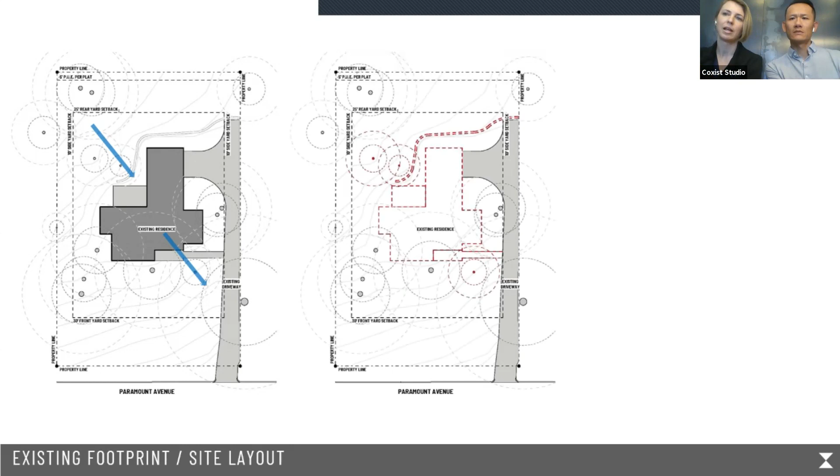This next one's just showing we're demoing out the retaining wall and demoing the existing residence. What was left here is just a quick layout of the half critical root zones and the quarter. The half is the lighter green and the quarter darker green. Those are the main areas we were dealing with. You can see the existing footprint in there.

What was left over was quite a big swath of area we could utilize in the back part of the site, allowing us to work the house from the back looking forward. So it really left a smaller backyard area, and a big area of the front yard that looked into the trees on this particular one. It also had to fit into the steepest topography in the back of the site.

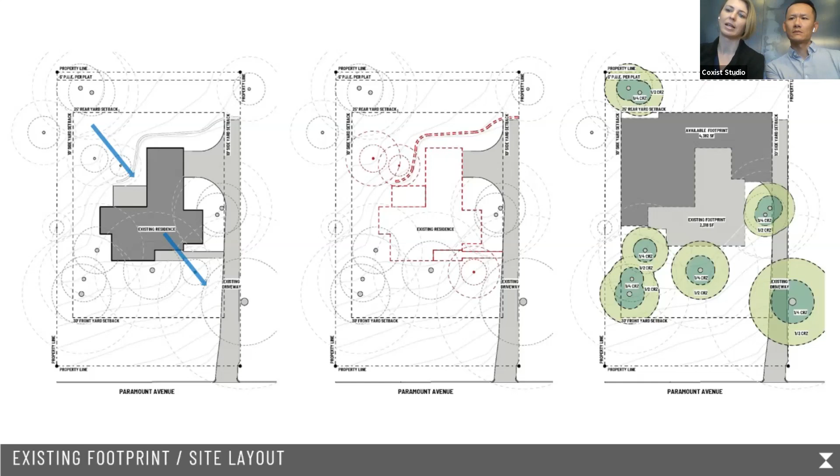So I wanted to quickly walk through some of the things required by the city on this particular site. I think most of you have all looked at and seen the standard tree protection plan. That had to be included, of course, in terms of fencing and mulching, dumpster locations, all that construction stuff.

In addition, we had to get a pre-approved demolition plan that laid out our demolition path for removal, and that was a pretty tight, narrow swath that had to come off the driveway.

They also made us include a grading plan, with a couple details here of retaining wall details that had to be shown to prove it was constructible towards the back of the lot when it got close to a half critical root zone.

We had to do concrete form details showing how they were staked out and formed for our cantilever slab locations. The diagram on the left, in magenta, shows where all our cantilevered slabs are located. The peach color is where our impacts are for the trees currently on the site.

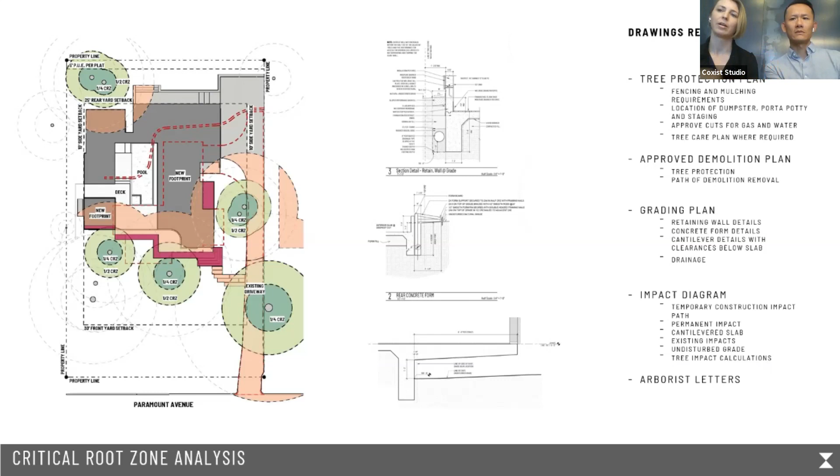We also had to show the clearances of those cantilevered slabs and drainage. So this is just an overall look of what was required by the city.

I'll go into this last city requirement. This is kind of what it looked like for us. We had to label out every single tree, the existing impacts, the removal of the existing impacts, and even the temporary impact zone, like the construction walkway. If we had done masonry, we would have had to widen that to 3 to 4 feet. For siding, that could have been narrowed down.

So they took into account every single part of the project, including the impacts that would not be a permanent building impact. The other thing to note is this tree already had a ton of existing impacts.

We can really only take up 50% of the overall critical root zone, or tree canopy zone. So that one was really challenging to work around, and we dealt with that a lot with some cantilevered slab solutions. We also had to do quite a bit of air spading.

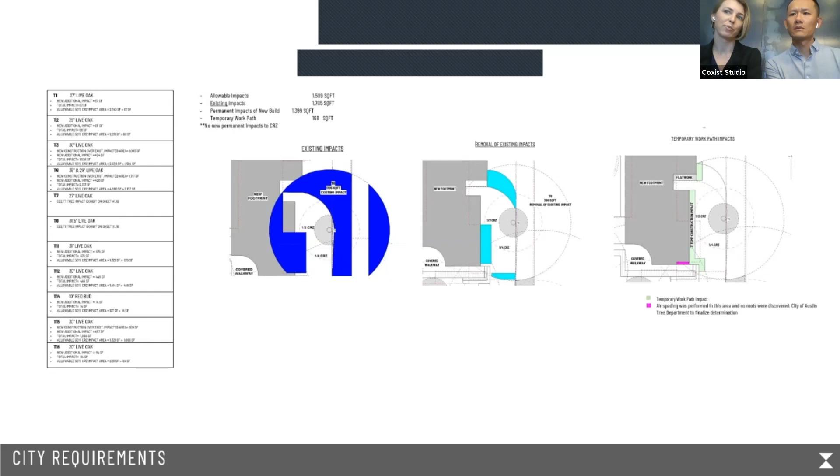On this one on the right, you can see this magenta zone. Because it was outside of the existing footprint, we had to prove that there were already existing impacts there.

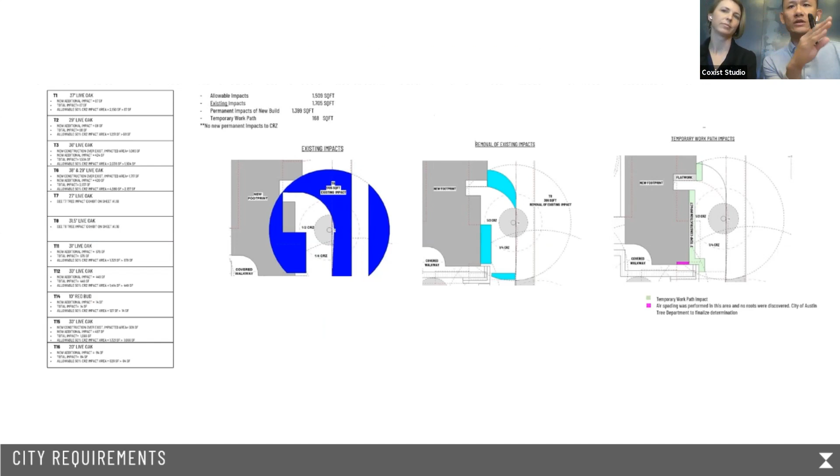Just moving on, you want to talk about air spading? So going back quickly to the previous slide, we had to do each diagram for the city, really showing each existing impact and the removal of the existing impact. What we're trying to do is really trying to help preserve the health of the tree.

So as architects, we always try our best to build what we need, and also try to find a way to really preserve the health of the tree, to remove some of those existing impacts, to give a little bit more breathing room to the root zone.

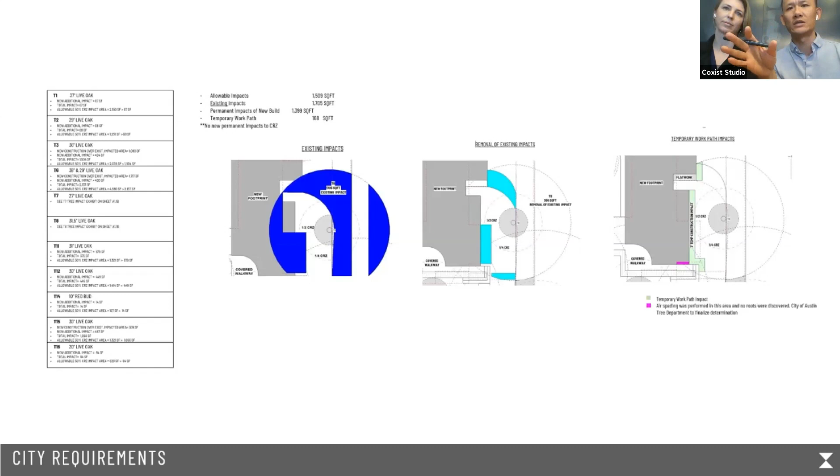So what we're trying to do is not add additional impact to the tree. We're going to keep the existing driveway as it is and reuse that for staging, also for the construction path. And doing so, we also have to prove that it's already impacted.

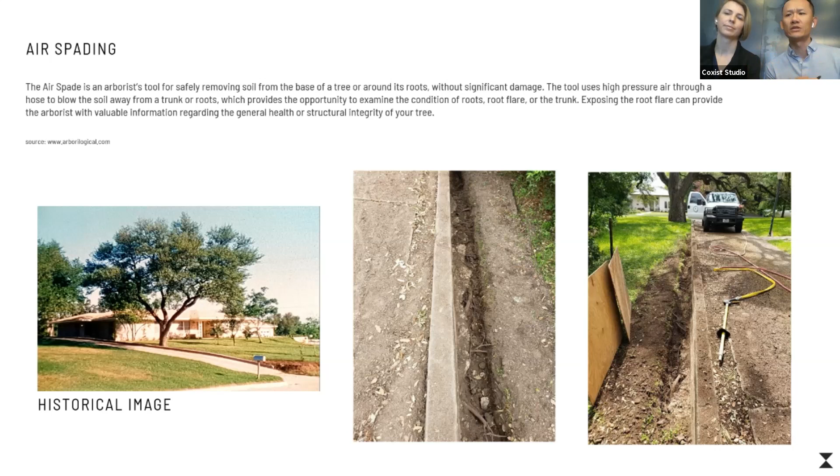So we had to cut a channel along the driveway to show the root zone along that driveway, to make sure there's no new impact, or that it's already impacted, to prove that to the city. So there's extensive research, going back to the archive and getting those images for the city for approval.

And that's just another image by the house. In order for us to extend our footprint a little bit further, we had to prove that there was no viable root zone in front of the house. So anything over a certain root diameter, we would not have been able to extend our footprint. But finding no roots in this zone allowed us to consider an impact.

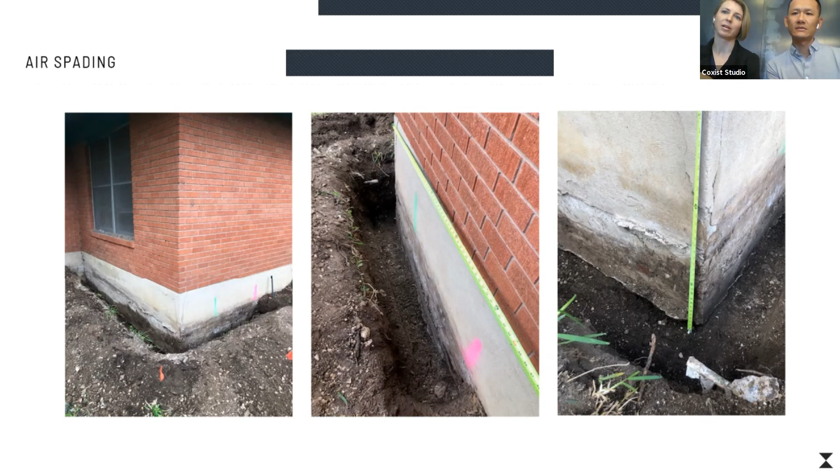And what we're trying to do with this particular house, this 5,500 square foot home, it's a pretty large project, so we always try to descale the project itself.

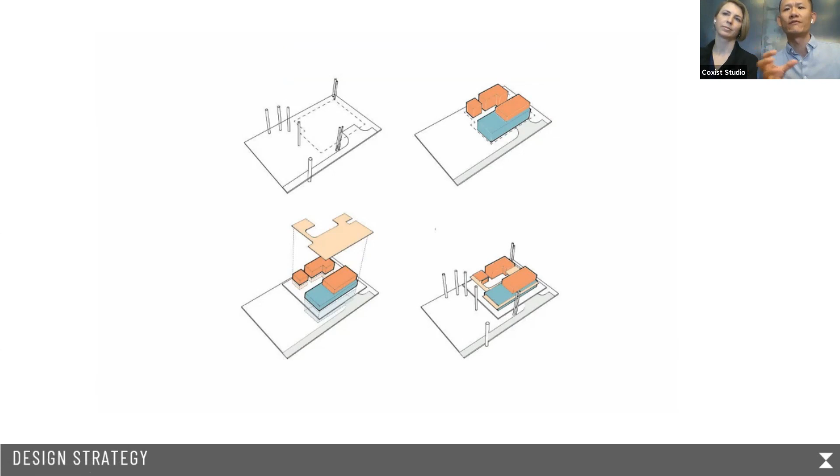So what we did is we broke up the entire house into 3 separate volumes, connected through some sort of breezeway. And by doing so, instead of having the house with the backyard facing the back, we're really trying to embrace the tree itself.

So we really flipped the floor plan facing the street. So your internal courtyard backyard is facing the street front, so you can really see the tree itself.

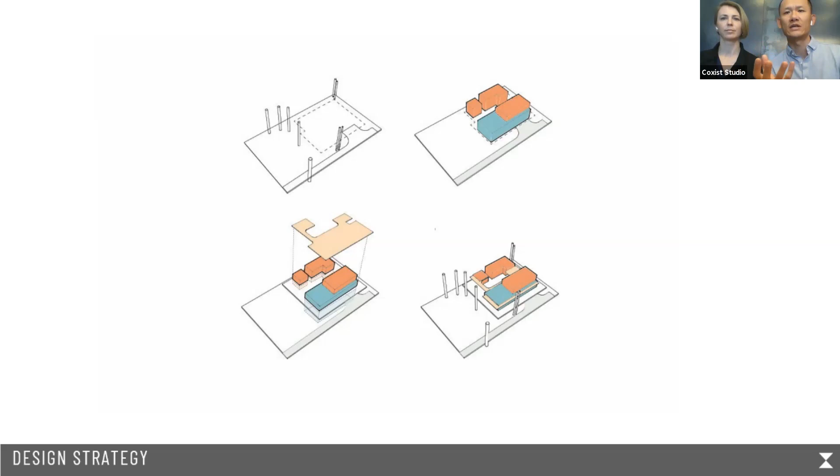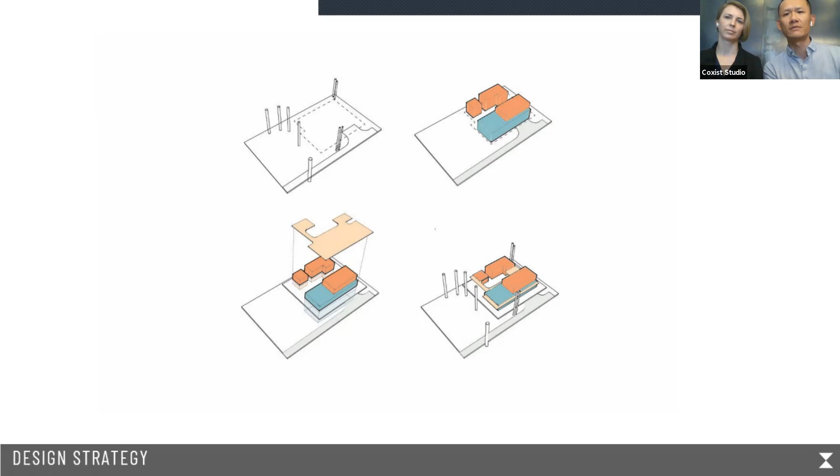The bottom left-hand corner is pretty much showing you how we deal with the existing and the new foundation. And also thinking about root zone placement, we decided to go with a cantilever slab at the front edge of the building, to really elevate the entire building off the ground to preserve the health of the tree.

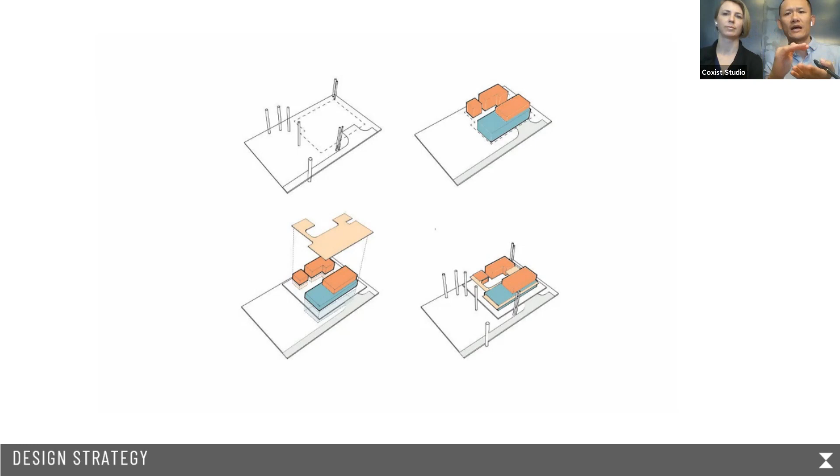So that becomes the concept for the entire house, making it more of a pavilion-like structure. So there will be a series of planes coming together as the architectural language. We have a cantilever slab on the ground, and then a roof plane, showcasing layers of systems to deal with the canopy of the trees, which we'll show you later on in the video.

This is what Frank was just talking about. Our inner courtyard here all spills and looks out into the tree canopies, using this kind of flipped-over layout. The backyard becomes the front yard, but the trees also create a lot of privacy, so it really feels privatized there.

And as you can see from the articulation of the roof line, and also the slope and the slab, all that curvature is not just for design's sake.

That's also the reason we did that—it's all responding to the canopy of the tree. So that organic corner condition is really responding to the site condition.

When we start doing the massing design and placement of the house, a necessary step for us is to look at the sun study. The placement of the pool is very crucial because even though we have an internal courtyard, we still want to maximize the sunlight going through it. So during the summertime, we want to make sure the pool placement is in the right location—we definitely have to do some sun studies.

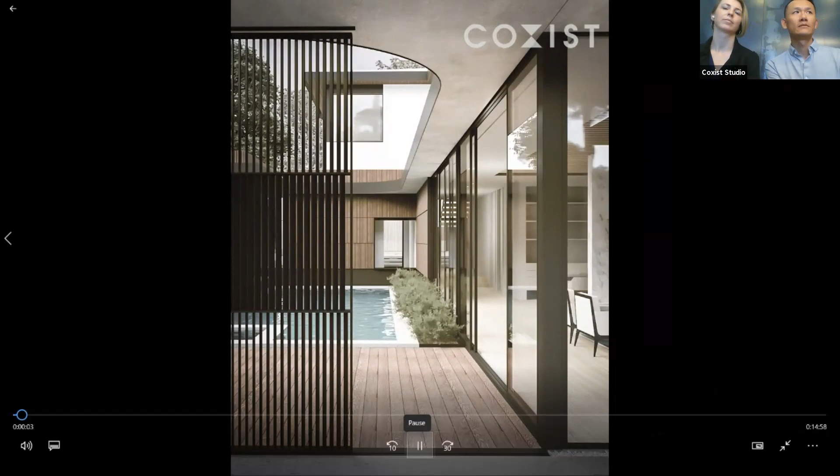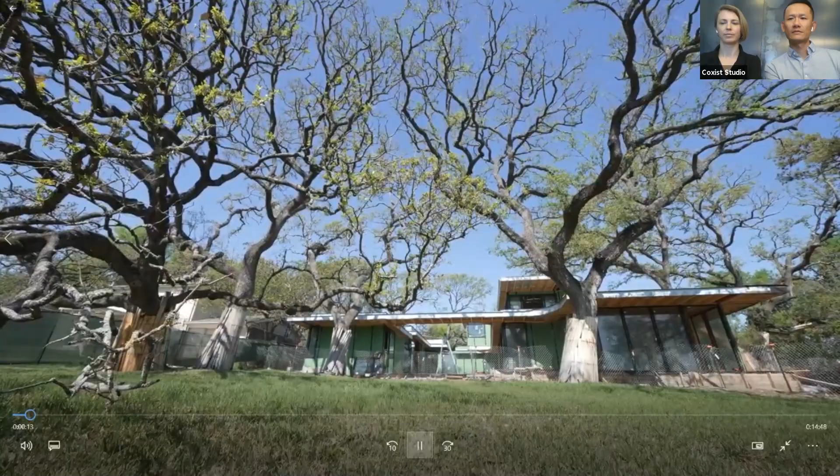All right, so we're here at the Paramount, what we call the Live Oak residence. The site sits a little bit higher from the street, and as you can see, we're situated around roughly nine heritage trees on this site. So there's quite a difficult challenge to design around that—the idea is to really try to preserve the health of the tree.

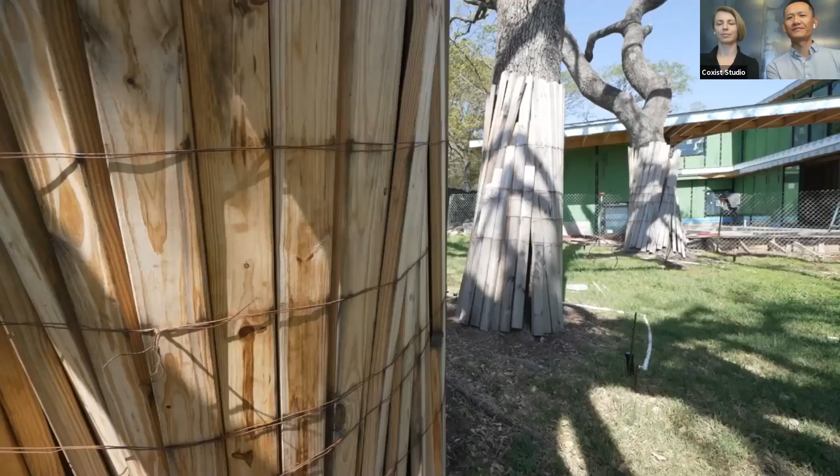The idea is to design in a way that we can elevate the slab and make this house more of a pavilion-like structure. By doing so, we established three horizontal planes to tie together three separate volumes—your casita, your master bedroom, and the rest of your house. The concept again is to really embrace the tree.

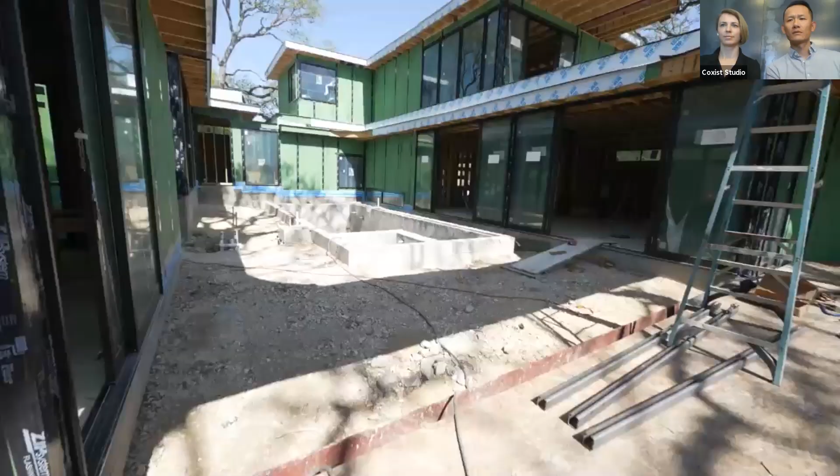As you can see with the courtyard—typically you'd have a backyard facing the backyard, right? For this particular project, we wanted to highlight the tree itself, so we reversed the floor plan: the backyard actually faces the street, becoming the front courtyard.

The void space in the middle is designated for your inner courtyard with the pool and spa area. The whole approach to this house is through the tree canopies, and our front entry is right here. It's supposed to feel like a pavilion space as you walk in underneath the trees.

Some aspects of the finishes we're going to use are natural wood siding and white stucco on the bottom and upper floors, really accentuating the boxes as individual volumes with their own materials, trying to make them as earthy and natural as possible so they feel integrated into the site.

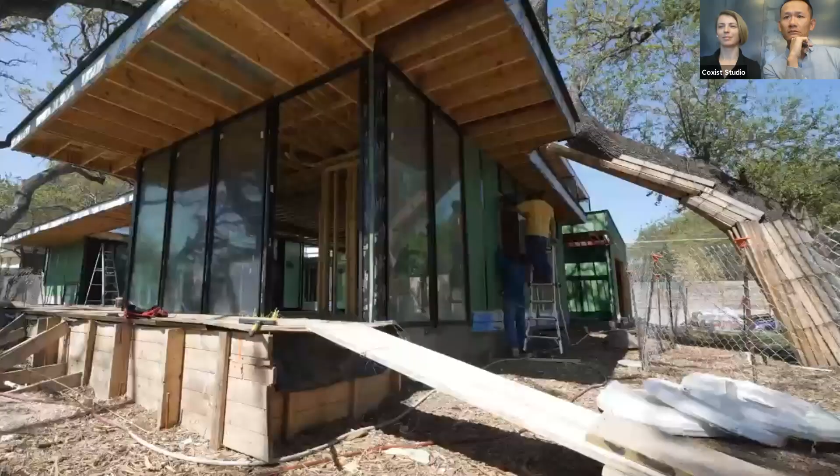As you can see, the arm right here next to the window is going to be our kitchen window view out. The way we dealt with this particular tree—the existing house was actually a couple feet over from the tree—so we pulled the footprint of the house back further away to give a little room to the heritage tree.

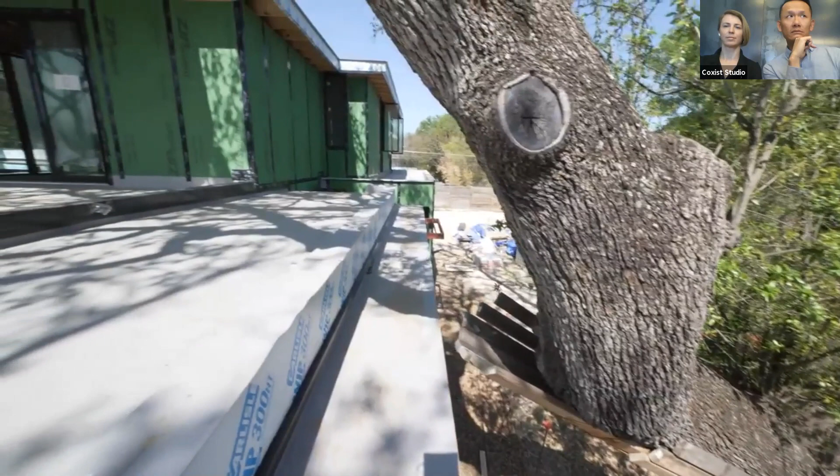At the same time, with this tree we had to map it three-dimensionally to map all the arms, so we know exactly where the roofline will engage with the arm of the tree, and make sure we don't touch it. Mapping the arm is critical for this project, to make sure the height is set correctly to maintain the health of the tree.

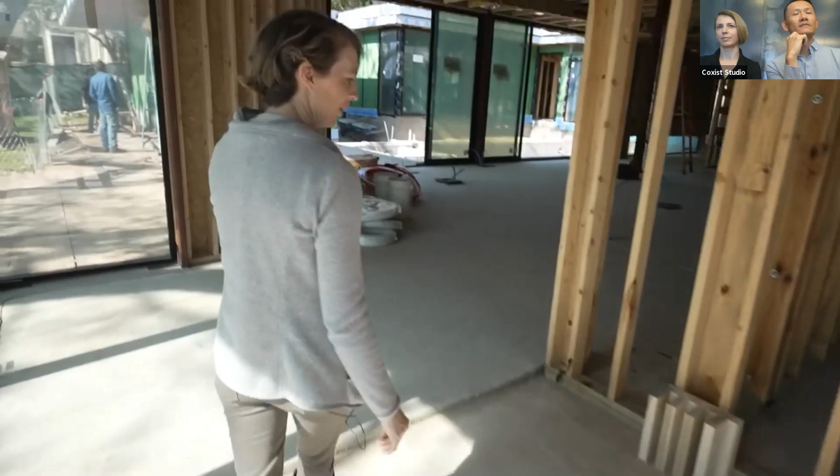As you can see, this corner becomes our main entrance to the house. Everything is surrounded with full-height glass, so you can really showcase and highlight the tree as you're inside. Walking into the entry, it feels like a big pavilion space with floor-to-ceiling windows.

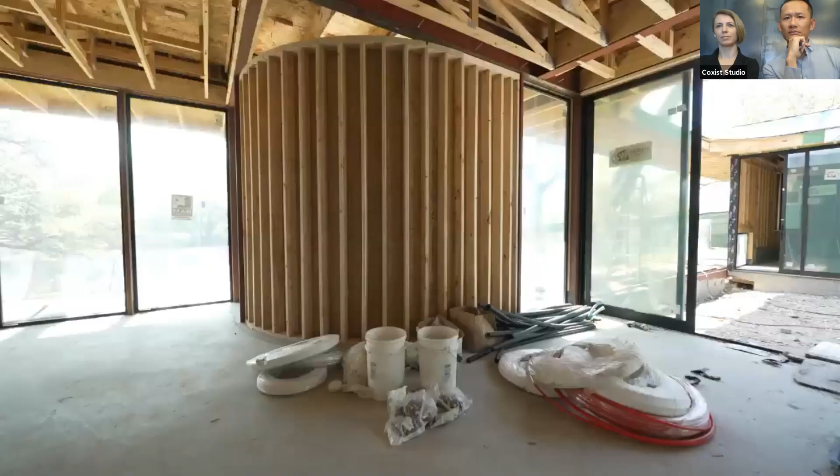As we walk this way, we have the curved wall that's going around here to help address the tree on this side. And we're standing in the living room right now. This is an amazing space where you get to see everything that's going on.

We have a huge kitchen window that really showcases the tree that comes up and over. So the sink sits in front of this space, and it just makes it enjoyable to be in the kitchen.

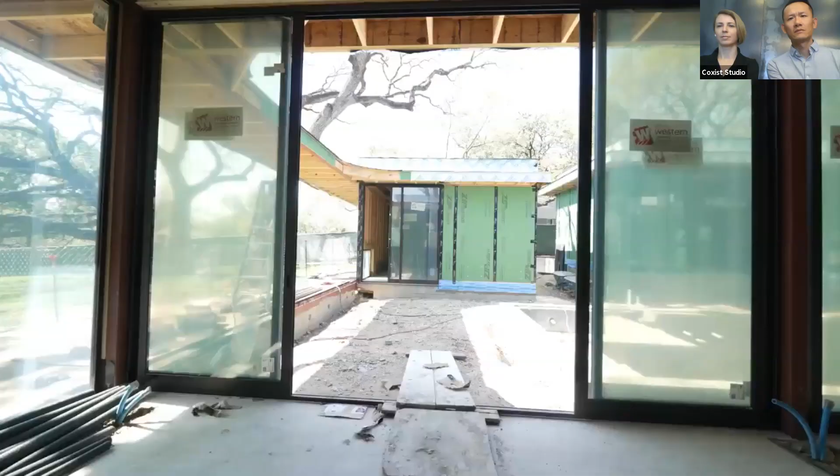As you look this way, we're able to open up this entire wall to open out to the pool and outdoor living space. It also, as you come around this corner, you're able to get the view of the beautiful trees that are out in the front yard.

So this space just kind of lives like an open floor plan. We're connected to the casita, the master wing. Everything feels like it's all connected within this inner courtyard feel.

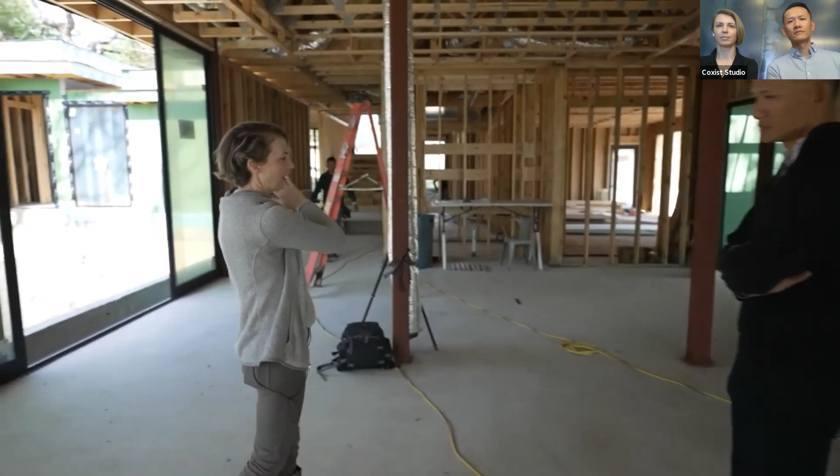Beyond this is going to be a large see-through fireplace, so it gives a sense of division in the space, but we can still see through it into the dining room, followed by the barbecue area, and just opening up across the entire space.

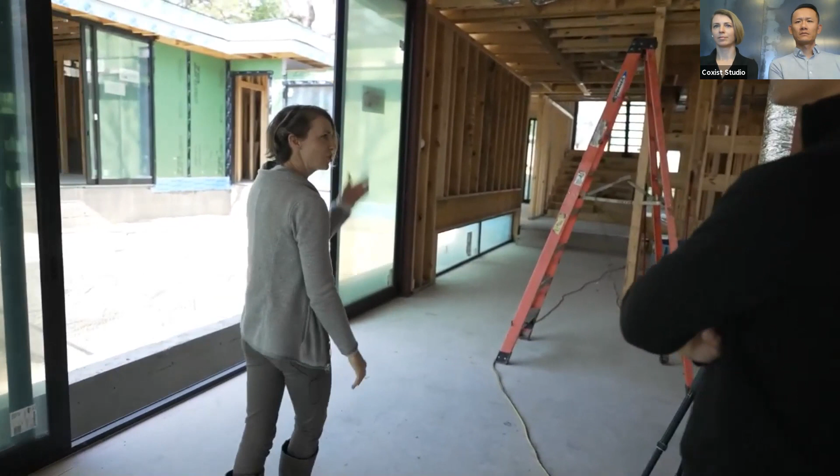We're trying to make sure as much as possible to capture as many of the tree views, but also maintain privacy of the side yards where we have it. So this inner courtyard also provides privacy in here without losing a whole lot in terms of what we see of the tree canopy around.

As we approach leaving the living room, the main space, this here is a hallway passage that we want to lead the homeowner to their privacy.

So this corridor really provides a moment where we can bring additional natural light, not from above, but from below, where we can really see the dappling of the pool reflections into the hallway.

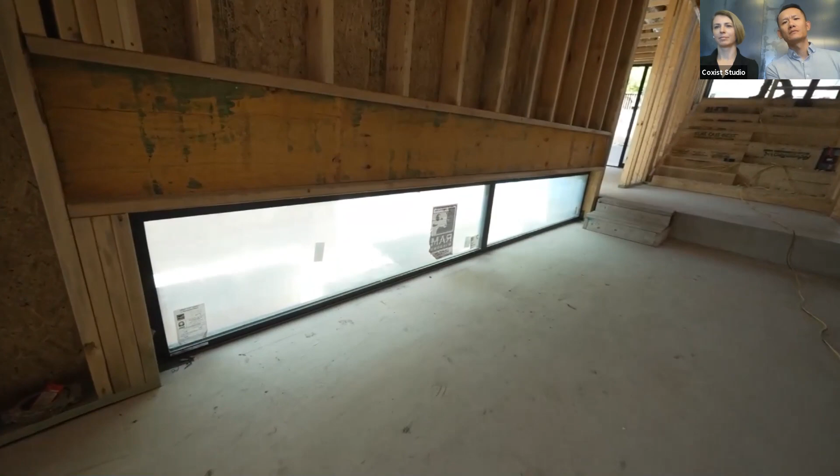By doing so, this becomes a zone where we create a visual focus to the second level. So this platform stairs become another main focus for the hallway itself.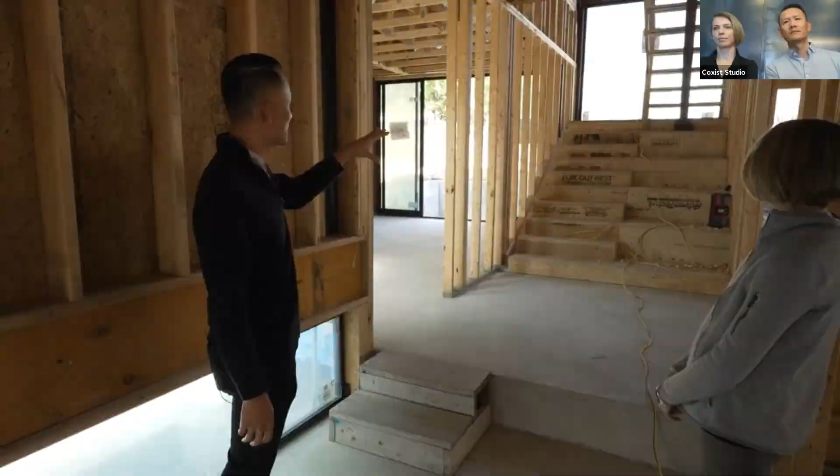We have floating stairs with the stringers open on both sides, which also really provide natural light into the hallway as much as we can.

As you turn to the left, we also have an exercise room for the homeowner. And on the back side, beyond that, we have additional backyard space that can provide the homeowner a vegetable garden.

So this becomes a point where two volumes start to connect: your main house, and beyond on the other side of the corridor is your master bedroom. But between the corridor, between the connections, we give up another opportunity where we have a big picture window.

With this picture window, you can really reflect back to the pool, and also with the window open, you can see the tree lines around this area as well.

So another moment to create the link between the two volumes. Again, we have another access point from the corridor out to the pool deck.

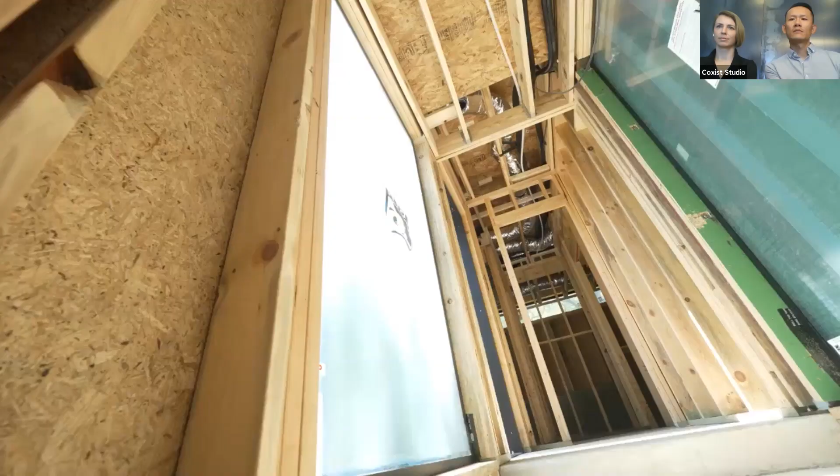And with this, we created two glazing openings where you can actually see the planters, like a sculpture garden, between the exercise room and the master suite. So this kind of cross link really provides more natural light into the space.

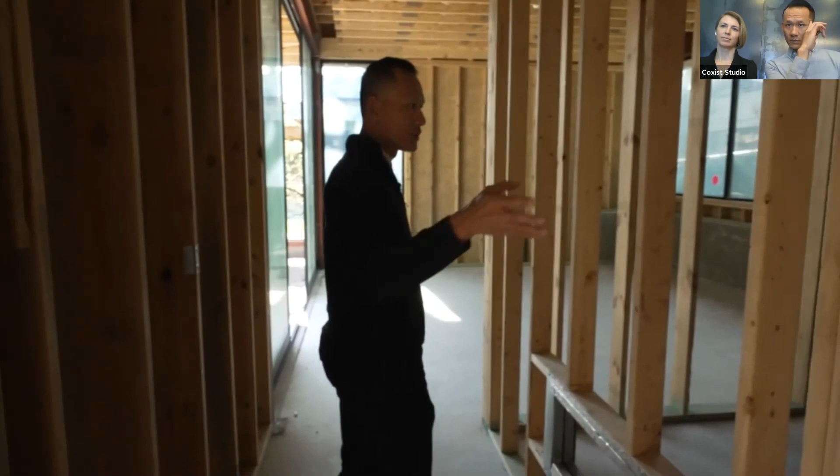Continuing down the hallway, to your right will be your master shower, and further straight ahead is your master closet.

So the master bedroom will be greeted with a continuous lattice roof, a ceiling plane coming into the master bedroom. The idea is we'll have a custom headboard as a backdrop, and also behind the windows, the idea is to really bring lots of natural light into the space.

And the fence you see right now will eventually be replaced by a solid fence with lots of planting to really hide the next door neighbors.

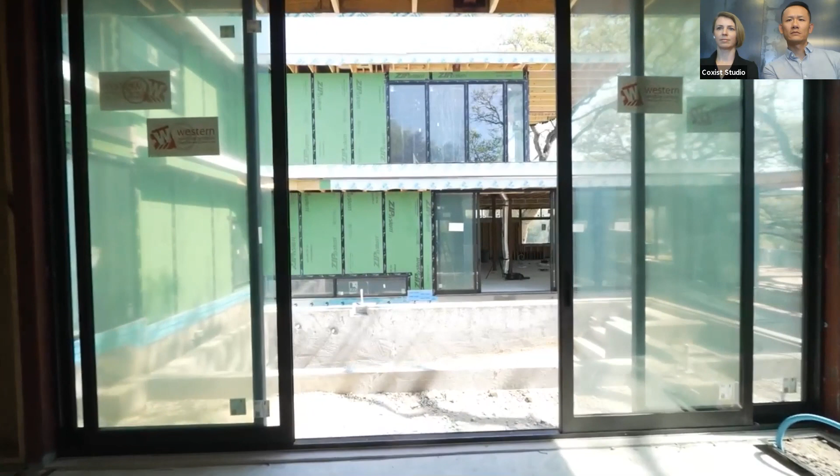As you're standing here in the main master bedroom, you're actually at a little bit higher elevation compared to the rest of the house. With that, you have a vantage point to the kitchen, the living room, and up to the family room. So you have the view in front of you as a foreground, and beyond that, your kitchen, living room, and dining room.

So you're really still able to connect, even though your bedroom is on the other side of the house. Sitting here, you can also see the upstairs level, so if your kids are upstairs in the family room, you still have some visual connection back to that.

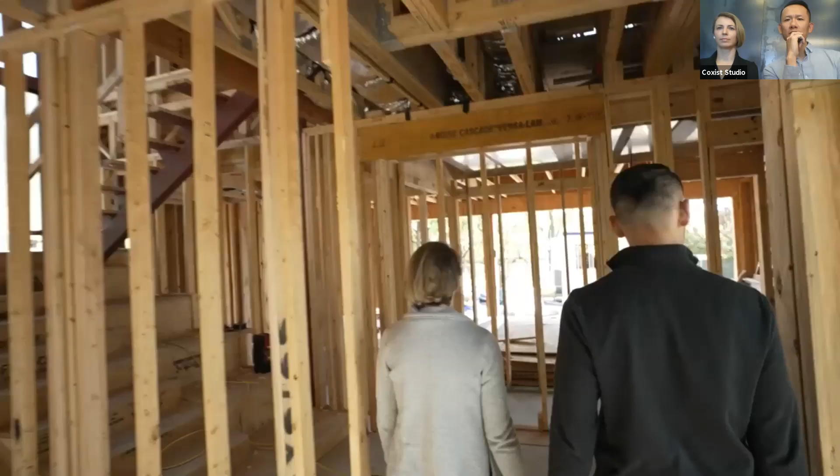One thing I just wanted to mention too, right here we have a green wall that's going to be installed. We have an interior designer out of New York we're working with, Crystal Sinclair. She's been great to work with. She designed a green wall as a focal point here, and I think it's going to turn out really beautiful, to also feel like that outside-in approach comes here.

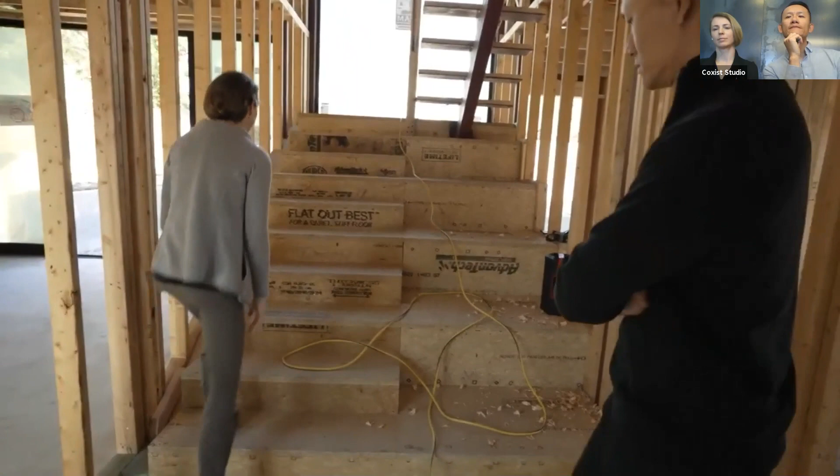Going up the stairs here, this is basically going to feel like a concrete monolithic stair and opens up to the open stair treads.

From here, there's a big window that looks out here. There's going to be planting along this back area, but the stairwell just feels like a split element that really connects you back to outside.

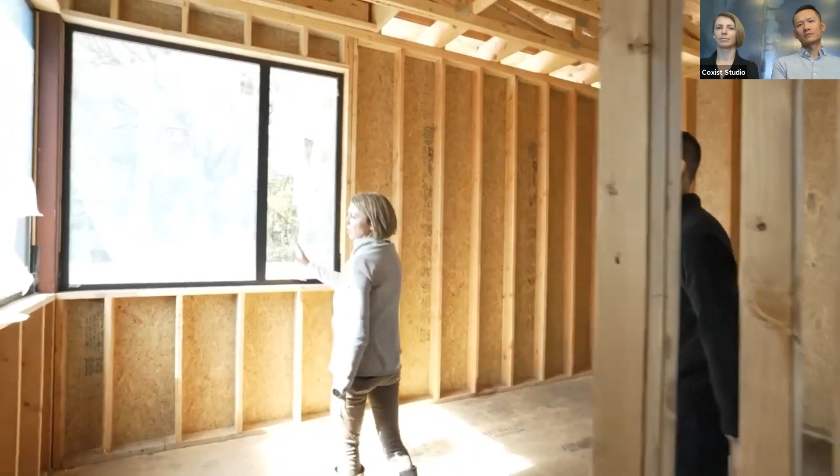There's a music room that's going to happen here. And from this room, there's just a wonderful view out through the courtyard where you can see how everything connects, how the planes all connect all the roof structures and just the canopy of the trees.

The level 2 really expresses this kind of tree house effect that we were going for, and as we move to the family room, you'll be able to just see how much in the canopy we really are.

So coming out of the music room here, there are 2 bedrooms, 2 ensuite bathrooms. We won't go back this way, but they're just out here on these 2 sides with 2 bathrooms here, and then a nice wide hallway to this family room.

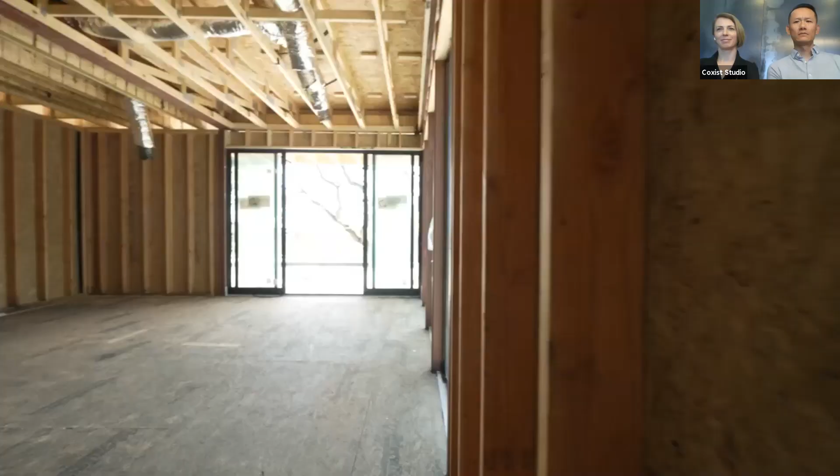We have a nice large family room right here, and this is really a wonderful space to spend time with for the kids and just anyone up here, because as you'll see, when you look out through this, you can see the pool, you can see all the different volumes connected, and the tree canopy is really spectacular.

This lot is quite a large lot for the Barton Hills Zilker neighborhoods here, so it's really spectacular that we get to enjoy this so close to the city. So walking out from this way, this is the outdoor deck.

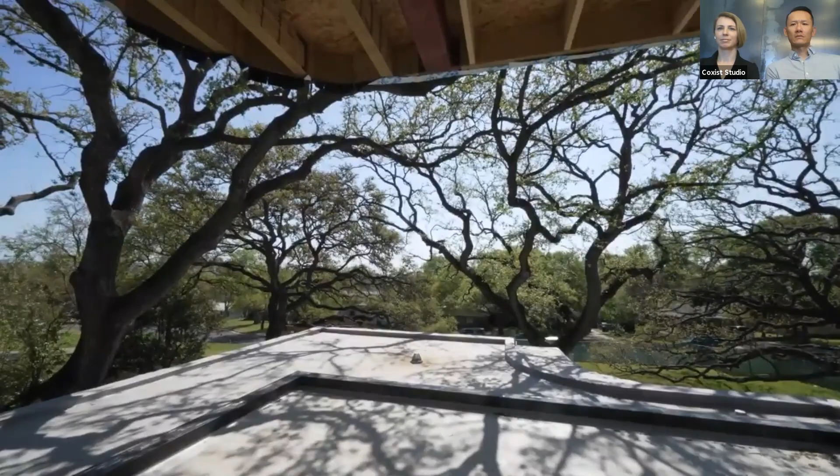The progression of this house really culminates on this deck, where you can kind of see everything interconnect. The roofing, the single plane, you can see how it ties in all the structures around. And when it's completed, these will really read like individual boxes coming through these very thin planes.

We are addressing basically all the roof with natural stone material. We want to keep everything as natural as possible, so we really feel like we're tied into nature. And really, how can you not be tied into nature when you look around here, because we are really in the tree canopies here. It's really one of the best spots in the entire house to be.

It's where you can really understand the design concept from our point of view, but also just really feel like you're in nature, so close to the city. That's not something you can get just everywhere, and it's something that we just really felt like with this lot, we had a huge opportunity and didn't want to lose it.

This is where I would spend most of my time if I were living at this lot. Also with what Megan just said earlier, how we have to map out this arm of this tree to really make sure that the roof line doesn't encroach on the tree canopy.

At the same time, we also did a drone study to capture what the view is going to be, or the downtown view, which is behind you. So those elevational studies are really a key point when we're doing design.

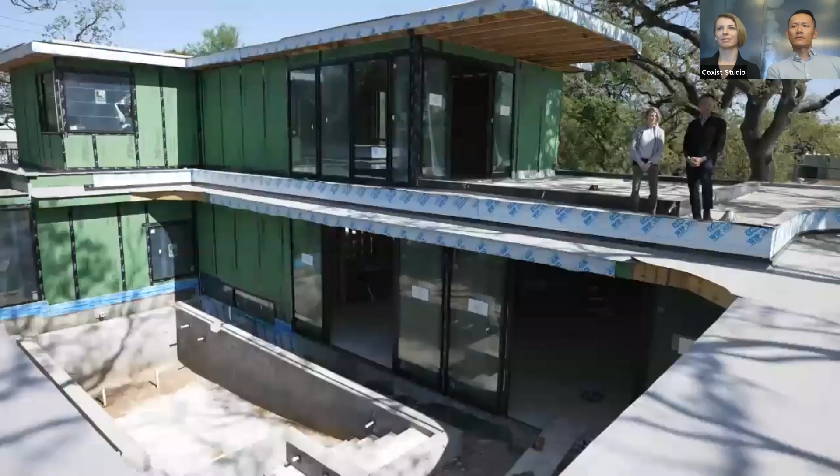So as you're standing here, you can really see all 9 heritage trees that really surrounded this entire project. This lot is roughly about 20,000 square feet, and we're trying to put the whole house about 5,000 square foot, 5,500 square foot home. So in order to maintain that scale of the project and also trying to descale the project at the same time is really challenging for us as well.

When we design, we really think about the community and also the surrounding context of the neighborhood. So with this, we really break up the entire 5,500 square foot home into 3 separate volumes. And by doing so, using this connected roof, we really unify that thing together.

As you can see, the inner courtyard is another key point when we start doing the design. How do we embrace this inner courtyard, and how do we fit this big pool in the inner courtyard to also capitalize on the sun itself, especially since we have 9 heritage trees around the site.

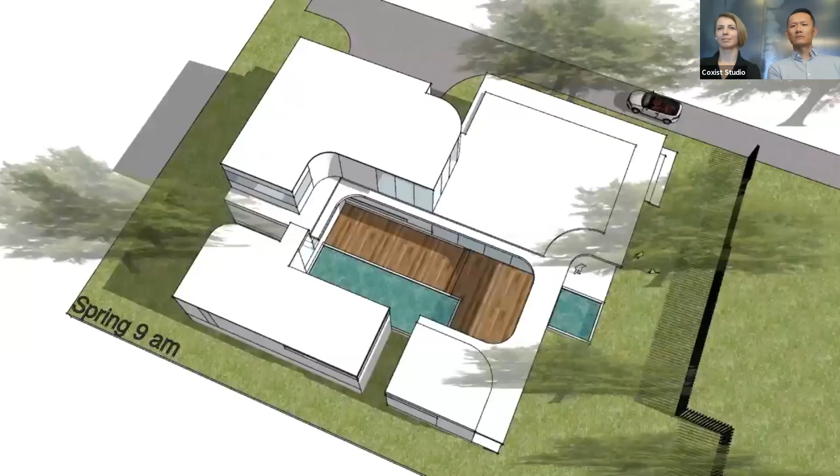So we had to do some sun study, really pinpoint throughout the year, different times of day, to do that sun analysis to make sure that the pool placement is in the right location to maximize the daylight throughout the day. That was the study that we usually do for most of our projects.

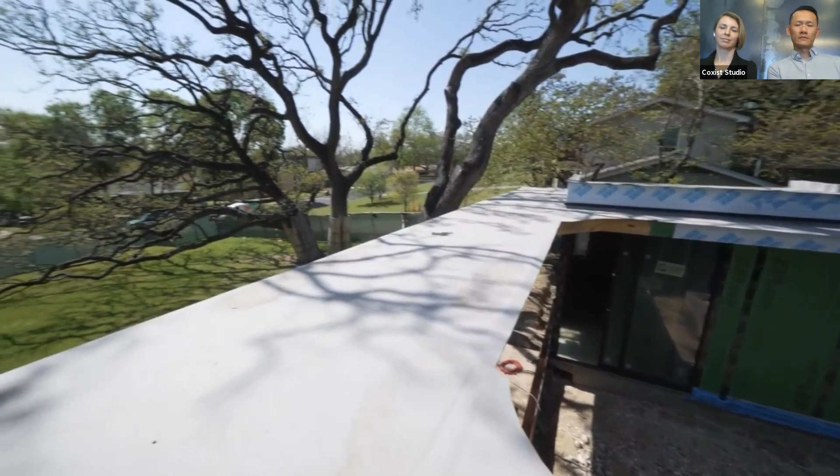As you can see on the master suite, having that master suite spill out to the pool deck is another feature. We want to make sure that each room has access to the inner courtyard and also has the view out to see all those trees.

So when AIA Home approached us to be the designer for this particular project, we were super thrilled. Once we saw the site, we saw the challenge that it comes with. For Megan and I, we just feel like this is the moment where we can embrace the architecture, really showcase what we can do to take something that is difficult and turn that into beautiful, right? So I think the opportunity definitely was something that we don't take lightly.

And so far, the house turned out amazing. The way that AIA Home executed the construction side of it, I think we're probably another 6 to 8 months out from completion. But this is something that we're just looking forward to seeing the final product.

I think the other exciting thing is when the client comes and takes a look, how excited they were, over the top. They saw it on the plans, but once they came in and experienced it with us and we got to experience it in reality, we all just felt like, oh, this feels right. So it's great to see when a client's happy like that.

We've all just been so excited about how this has been turning out, and it's just going to get better from here. So I hope you guys get to see the finished product at some point. We'd love to share it with you, but super thrilled how this is going.

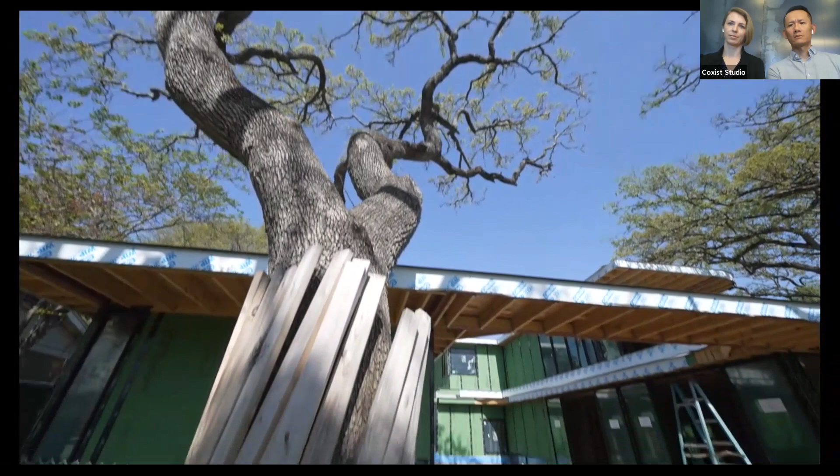The site has 9 heritage oaks on it. The trees range from anywhere from 200 to 400 years old. Of the 9 trees, one of them is actually our neighbor's tree that we're also protecting. You can see here that we have wrapped all the trees in 2x4s to protect the trunks from any kind of strike damage that you may see.

We also worked with fencing off the whole yard space here so we have no construction traffic coming through this space. So basically what we've done is created a full protected zone around these large trees to circumvent any kind of construction from happening in this area.

We are utilizing the existing driveway from the original house as our construction access, and our neighbor has a really large oak tree right on the property line that hangs over this driveway. So one of the things that we did here was carry the tree protection onto the trunks of the trees that are hanging over the top of the driveway so that we could keep those from getting struck by any construction coming through during the day.

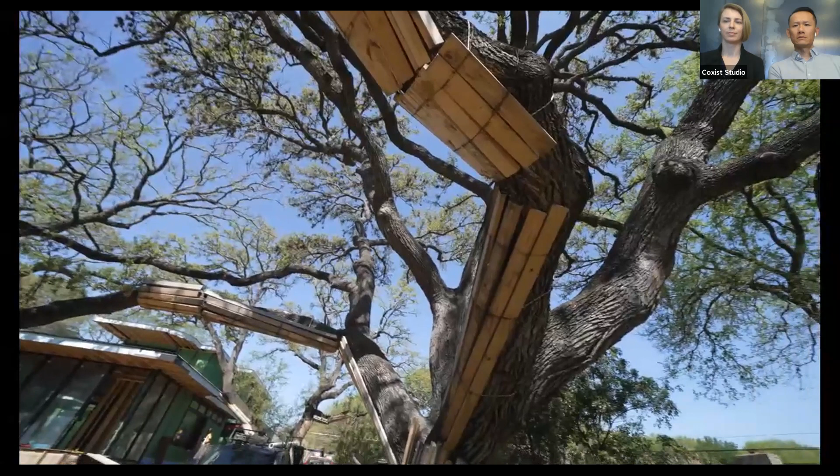We're required to protect these trees from the city arborist standpoint, but we're also protecting them because they're such a major asset to both this project and the neighborhood. These trees are several hundred years old, and they really have a place in the heart of the neighbors around them and a driving force in the architecture and design that we made on the lot.

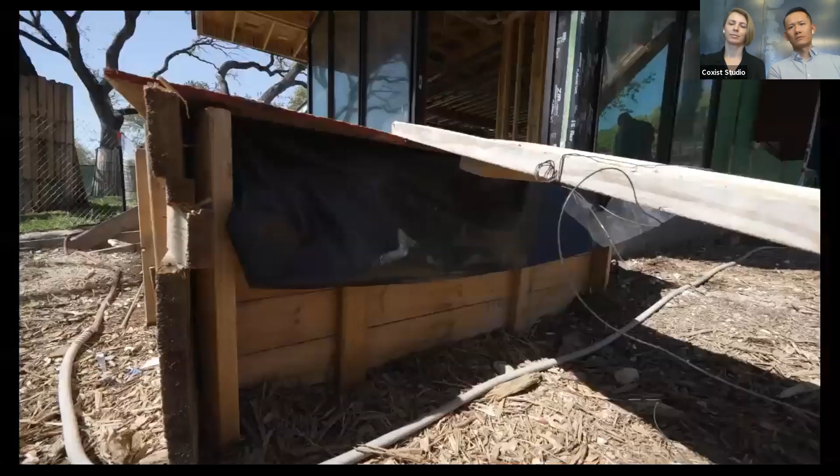One of the construction methods that we used on this project was a cantilevered foundation. That detail can be found on the whole front perimeter of the structure. This cantilever allows us to hang over the half-critical root zone of these trees, partially encroaching into them and partially using existing impacts is how we were able to move the structure to this line on the property.

Right now we have the cantilevers still framed up and protected, and we'll break those at the end of the project. A detail here where we have broken part of the cantilever in order to facilitate our waterproofing detail. But you can see how this is hanging back about 5 feet underneath the structure, allowing for us to build into the half-critical root zone of one of these big oaks right here.

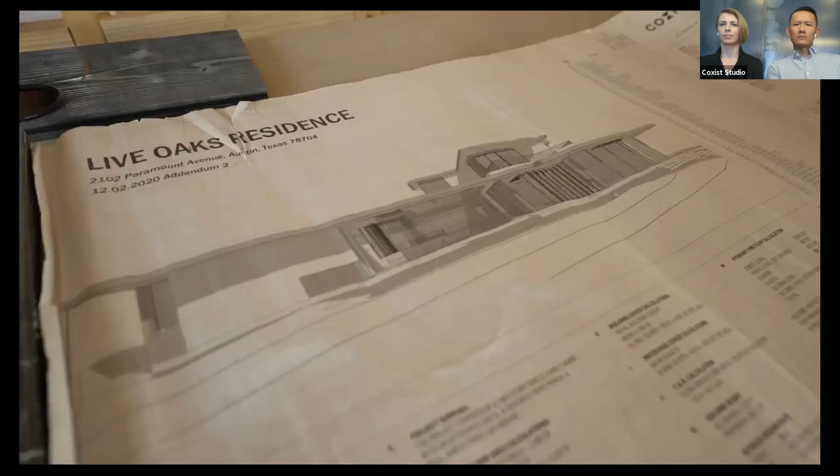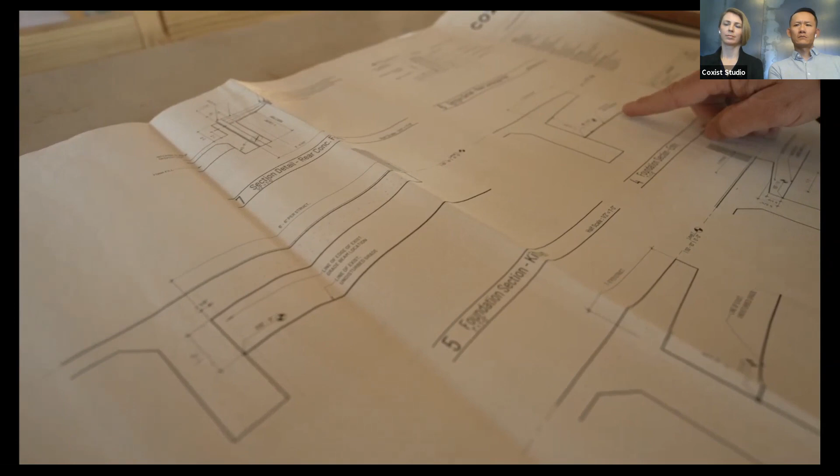These are some foundation sections showing the cantilevered slab condition that we have on the front and side of this house. You can see we have a fairly substantial overhang here for all of these conditions, some of them up to 5 feet. The thing that we had to do here for this detail was keep clear of the undisturbed grade. That's one of the things the City of Austin wanted to make sure that we maintain inside of these half-critical root zones for these trees.

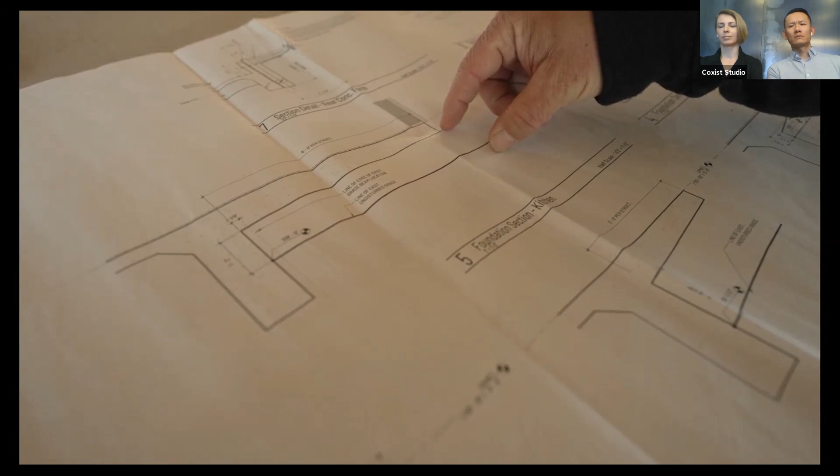The other thing that's interesting about the way we did this to make sure that we weren't disturbing this grade with stakes or form boards or anything like that is we used void form boxes to support all of this structure so that there is no impact into the soil here. Once we break form, we'll be able to remove these and maintain that undisturbed grade that the City of Austin is looking for in these half-critical root zones.

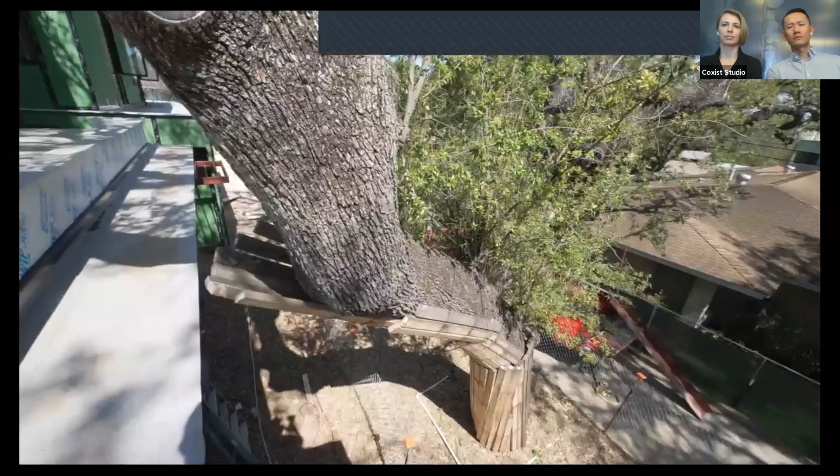We're up on the second story of the house now, and one of the cool things about being up here is this feeling of living almost in a tree house. But in order to facilitate that, you can see how close the trees got to the structure. One of the things we did through design was really look at these arms and model and see how they were going to work with the structure themselves.

You can see how we built a radius inside of the soffit here in order to facilitate this tree. Again, you can see how, as we get up here on the top, our overhangs and things like that really began to integrate themselves into the structure. So when you're up in this space, you have this feeling of living in a tree.

So that's a basic overview of some of the practices and methods we used on this project. Obviously taking on a project of this scale and scope inside of the trees has been a challenge, but again, we feel like it's a real value add to the house, not only for the homeowner in the long run, but also for the neighborhood and for the city to be able to responsibly work in and around these large trees and create something that's pretty special for the neighborhood and for the City of Austin.

Okay, so that's what the presentation covers. Brent, do you have anything you wanted to add about the process or anything on the site?

I saw a couple of comments in the chat about the timing on permitting. One of the challenges we had was navigating this about this time last year, at the beginning and height of the COVID crisis, which added an extra level of difficulty to moving this through. We tried several methods, including expedited meetings, but couldn't get a lot of traction. As everyone knows, that was the bigger challenge, just getting us to a spot where we could start. Once we started, the design work with Frank and Megan really came into play, and the methods we used are helping us develop around these trees.